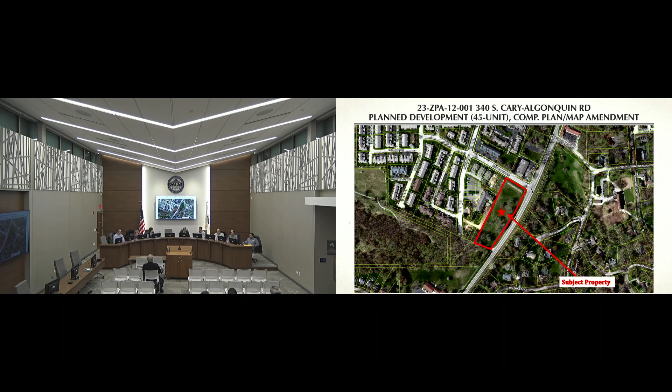A little background on the property: it's currently zoned B3, the Fringe Business District. They're requesting three approvals this evening: one for a comprehensive plan amendment to change the zoning, or the comprehensive future land use plan map, for the property from commercial to multifamily; a zoning map amendment to rezone the property also from the B3 district to the R3 district; and then a planned development approval for the proposed project, a 45-unit, three-story structure.

The history of the property: it was annexed into the village in 1974 as part of the Cary Oaks campus. It originally was zoned B5 office research, and you can kind of see the status of the property in the lower right-hand corner there when it was annexed into the village in the 70s. In 1997, the property was rezoned to the B4 Neighborhood Convenience District. That was a village-initiated rezoning project as part of a comprehensive update to our zoning regulations. And then again, the property was rezoned in 2004 to its current zoning classification, the B3 Fringe Business District.

The property has never been developed within the village. As you can see by the aerial from 1973, what was now the former school building, another apartment complex, was existing at the time. It's gone through renovation, but there was a driveway that went through this property, but there was never a formal development that occurred on this site.

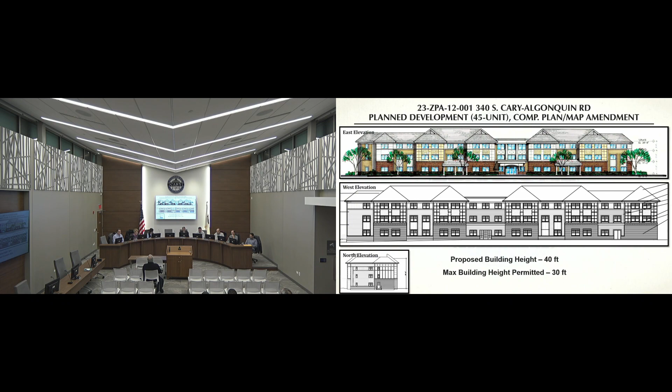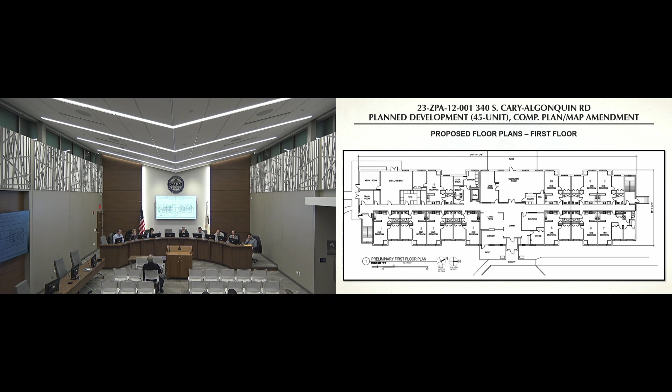This slide shows the proposed floor plans for the first floor. Again, a mix of one bedroom and two bedroom units throughout the building. I believe the mixture is 38 one-bedroom units proposed and 7 two-bedroom units proposed. There will also be various community rooms for residents to utilize within the structure.

There would be some landscaping provided around the site. Obviously, there's some existing vegetation on the property that would need to be removed to accommodate the proposed development. However, the petitioner will be proposing additional landscaping around the facility to screen it from adjacent land uses, which would be compliant with code.

One of the conditions is for some minor modifications to the plan in the southwest corner of the site to provide additional screening from the adjacent duplexes, which will eventually be constructed in that portion of the property.

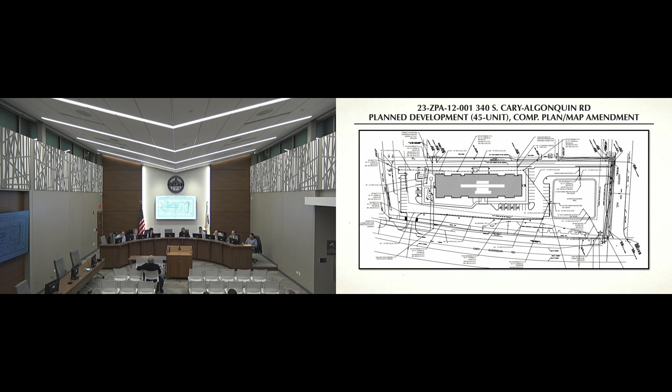Additionally, for plan development, there are various standards within the Unified Development to support a plan development, specifically looking at the comprehensive plan, conformity with general planning policies within the plan, the impact on the property and the area, proposed adequate provisions for ingress and egress to the site, and adequate buffering from adjacent uses, to summarize a few of them.

Additionally, for the proposed modification standards for the two departures that are proposed, they would need to be in keeping with an overall integrated design, location of higher buildings on the site, and things along those lines—considerations the board can take into account as part of a request for review of a plan development.

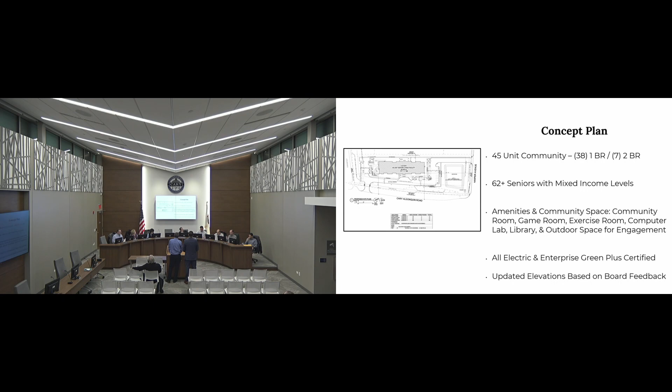Brian, if you could please go back to the image of the site plan. So this one, you've got two at the front door, and then if you go northwest of the building there's 2 there, but that's not on our plans. I just want to make sure when we're done, you have the right layout that you're looking at. Because here we've got 2 on the west side and 4 in the south, and they're all sharing a space in the middle.

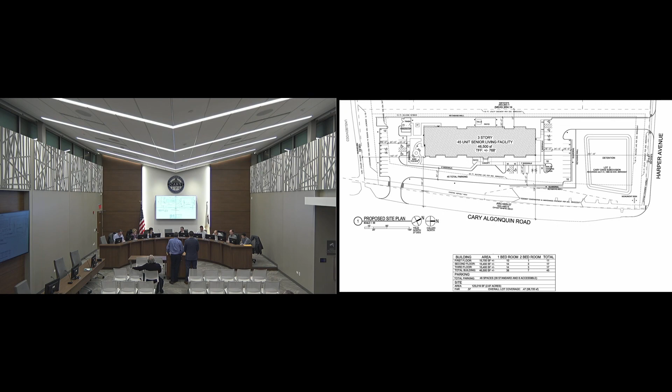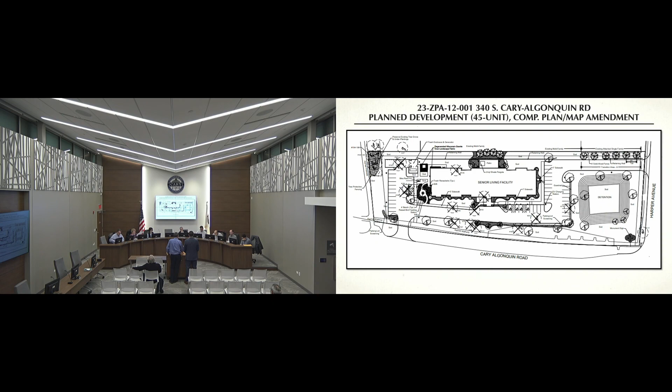The sheet that should be correct is the 4 on the east side of the building, off Algonquin Road. There were iterations that changed, as we were picking up comments from the fire department and moving things around, making grading work at the last minute, so the preliminary engineering would actually be something we could build. I apologize if the site plan is slightly different.

That is the correct site plan. So the C4.0 civil drawings show each space having their own stripe next to it, but here you're showing them with 2 sharing. This is the correct one. My apologies for any confusion, I just want to make sure we're voting on the right thing. I don't want to vote and have discrepancies in there.

The site plan in the petitioner's presentation was for the previous iteration, so what you have in the packet should be more accurate. That's on A1, correct, not civil. Civil looks like it's 1 less parking space, which would then be below the minimum. The minimum requirement is 45, so we can verify the final plan for the site has that 45. A1 has the 45.

I just want to be sure. Good catch, I appreciate the question, and again I apologize for the discrepancy. I didn't think shared areas were allowed, I thought each handicap space had to have its own stripe. They changed that law a couple years ago. Oh, I haven't been working for a while. Now you know, Mr. Graziano. Makes more sense to me, but okay.